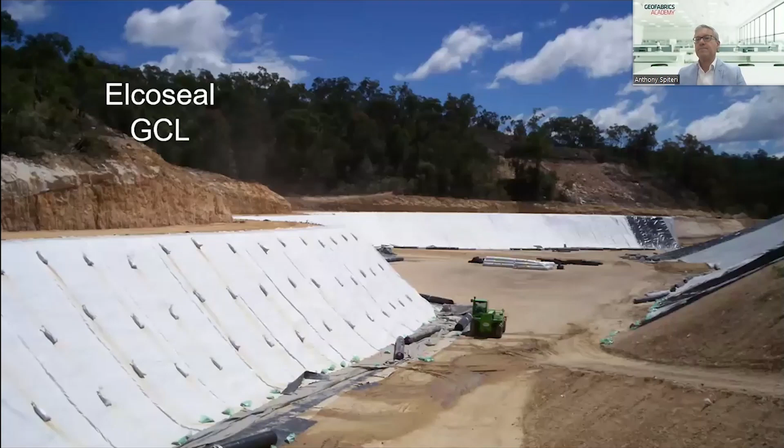And here's an example of a liner or a cell going in and the use of a composite liner on the slopes of that particular cell. So you'll clearly see the GCL underneath, overtopped with a geomembrane, a cushion geotextile on top. And this is a typical cross-section of the Elcoseal type GCL.

The top or cover geotextile is normally a non-woven staple fibre geotextile manufactured at our Gold Coast facility. The middle part of the product, we use a powdered bentonite mined in Queensland. Other overseas GCLs can use granular bentonite. And the bottom, or the carrier geotextile, is normally a woven geotextile with or without a non-woven composite. So the woven only will be our X800 and X1000 grades, and the composite, which is the woven non-woven, will be our X2000 or our X3000 or the various other hybrid GCLs that we manufacture.

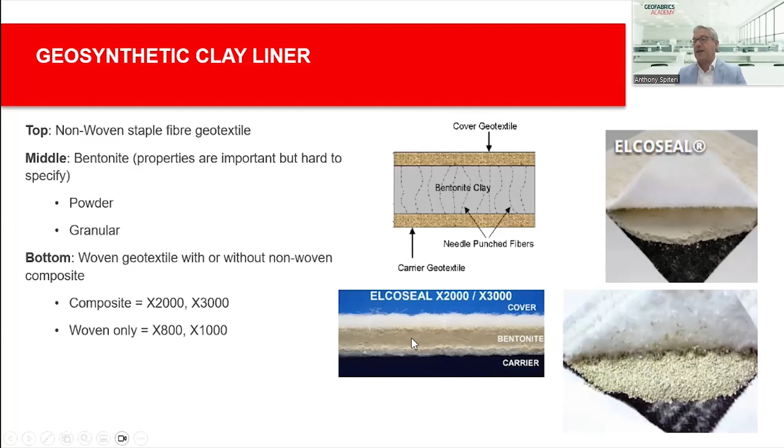So the photo you see below here, Elcoseal X2000, X3000, shows a really good cross-section of a hydrated GCL with the bentonite not in powdered form, but obviously been exposed to moisture, and is in a gel or a pasty type form.

One of the major criteria as part of BPEM is that the supplier of a GCL must demonstrate the durability of bentonite. The BPEM guideline clearly states the use of pH modifiers is actually demanded, stating on page 96 that sodium activation or beneficiation must be done to increase the amount of exchangeable sodium plus ions. So the guideline requires demonstrated durability of bentonite used within the GCL that contains additives comprising both the pH modifier and polymer additions. This requirement must be considered best practice.

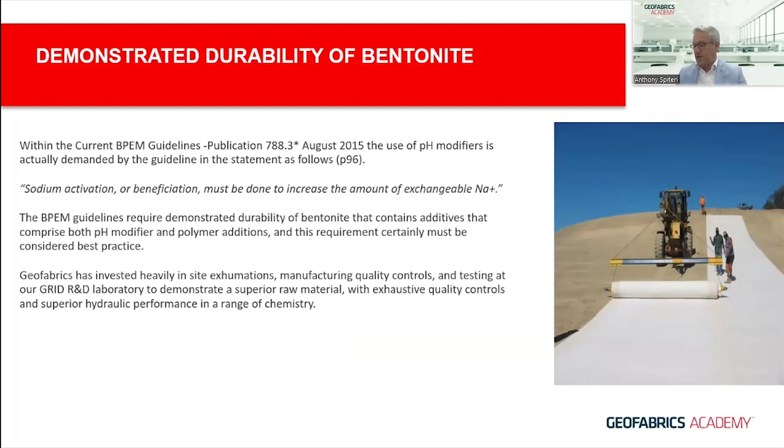Geofabrics over the years has invested quite heavily in this part of the market, with in-site exhumations, manufacturing quality controls, and testing at our R&D lab to demonstrate a superior raw material, which is the powdered bentonite, with exhaustive quality controls and superior hydraulic performance in a range of chemistries during the production phase.

There are 5 key requirements of performance spelled out in BPEM that we believe demonstrate long-term durability, and these are the 5 here.

Very briefly, there's a statement as to the nature of the additives. There are technical papers both from industry that correlate directly to the additives used by Geofabrics, as well as from industry that test the Elcoseal GCL product with the additives. That testing is done independently.

Fourthly, in-house and project-specific testing for clients that exceeds what industry considers best practice, carried out over an extended period to demonstrate longevity. This longevity is demonstrated in the 5th key requirement, that site exhumations were carried out with up to 17 years exposure in service.

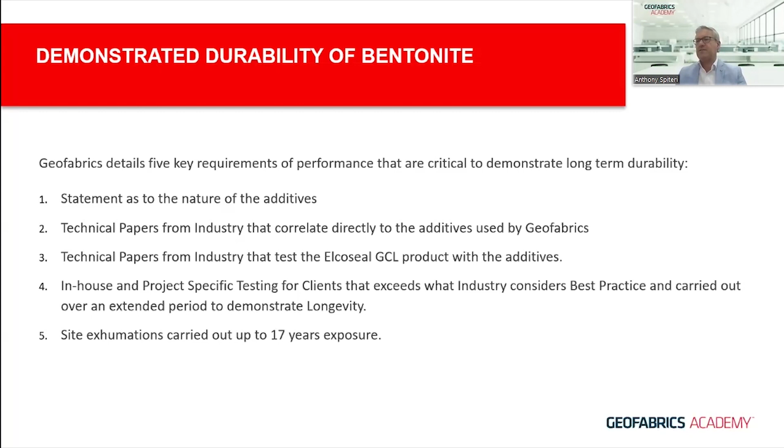Part of this will be on a typical landfill cell construction or a cap construction that Geofabrics can detail, and we'll send you a letter detailing this particular work carried out with these 5 key items I just talked about. So you'll get a letter similar to this - the first opening paragraphs will talk about your project, the product used on your project, and how it demonstrates the durability of bentonite.

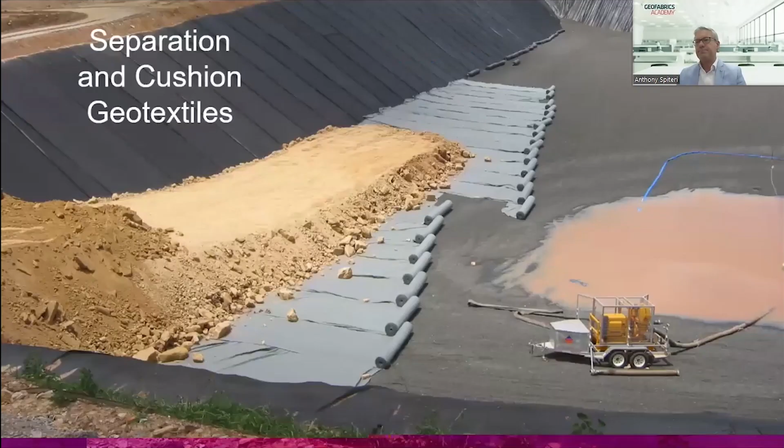Moving on to separation and cushion geotextiles, you can see quite clearly here in the photo the rock which forms part of the drainage layer for the leachate in the baseliner, and you have the separation or sacrificial, in some cases, geotextile layer out there in the colour - the bit of product. One of the major parts of a technical specification for a landfill baseliner is looking at optimising the protection for the geomembrane within that lining system.

So you as a client need to carry out a cushion test. The cushion test is carried out in the laboratory - it can be carried out by our GRID team, or independently through other testing companies in Australia. Essentially what we're trying to do is show what the geotextile provides as far as protection for the geomembrane layer - it provides cushioning and protection, and they're considered essential elements of that lining system.

Part of the cross-section will consist of a GCL, a geomembrane, a cushioned geotextile, the leachate stone, and embedded on top of the geomembrane will be a very thin aluminium plate, used to try and simulate when the load is applied to that system, that the rock is then trying to push through the geotextile and into the geomembrane. So essentially what happens is, after the test, the aluminium plate is taken away and assessed, and the strains are generally recorded.

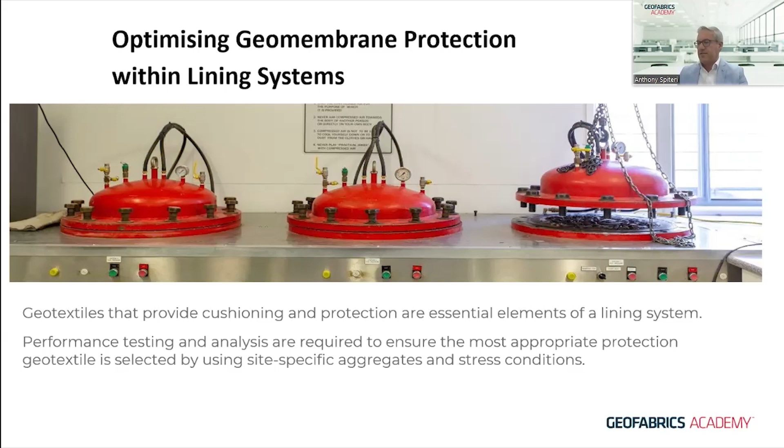Moving on to test standard comparability, and this is really the major part of the presentation today - the many questions I receive on this topic. As you know, geotextiles that provide cushioning and protection are very essential elements of a lining system.

The Geotechnical Inspection and Testing Authority, also known as GITA, post-delivery of goods to site, is MQA related. We generally get lots of questions and inquiries about this as far as test standard comparability.

As an Australian manufacturer, Geofabrics utilises the AS 3706 suite of Australian geotextile testing standards. These standards are modelled on internationally accepted geotextile testing standards. So in the interests of manufacturing and testing reporting consistency, and where equivalency has been clearly determined, the Australian standard is generally selected as a standard of choice.

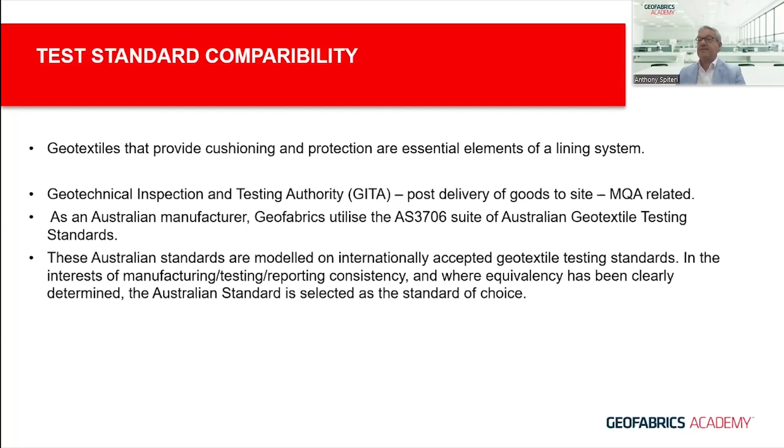You will all be familiar with the various standards around the world, whether they're ASTM - obviously we have AS standards here in Australia, and there are European standards for the European Union. So what I'm trying to simulate here is just giving you a bit of an idea for the various geotextile mechanical and hydraulic properties, what the specification standard may be, and secondly, what is the manufacturing standard Geofabrics takes up as part of when we make these products.

As you can see, we've got various mechanical properties and hydraulic properties. Mass per unit area is the first one.

So essentially, if we're comparing AS 2001 with AS 3706, that refers directly to testing as per AS 2001, but it requires 10 specimens to be tested rather than only 5. So we find that AS 3706, with 10 specimens being tested, is more onerous and better suited towards geotextiles.

Similarly, against the ASTM standard D5261, both standards specify 10 specimens again, and a minimum specimen size of 100 by 100 millimetres. They record the weight to 0.01 grams, so it's very accurate, and the unit of measurement universally is grams per square metre.

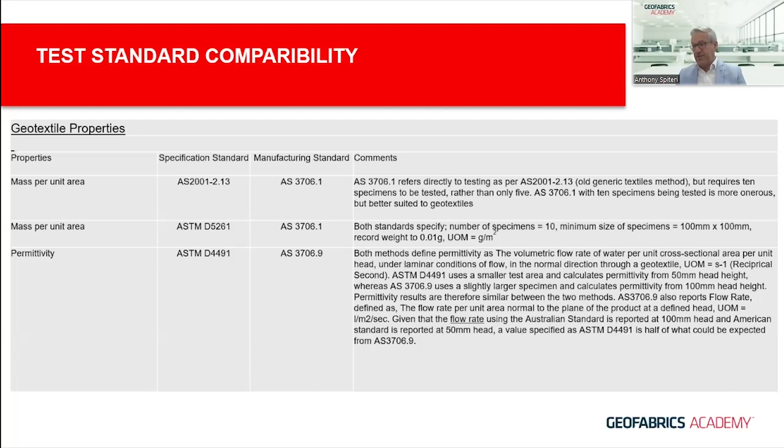Given that the flow rate using AS is reported at a 100mm head, and American standard at 50mm, the value specified in ASTM D4491 is about half of what could be expected from AS3706.9. So comparisons can simply be made.

There's a few more here which I won't go into all of them, but it includes grab tensile strength and elongation, trapezoidal tear strength, puncture or CBR strength, and also UV resistance.

I'll briefly talk about the last two, CBR strength firstly. Both standards specify 10 specimens, a plunger diameter of 50mm, a clamped open test area diameter of 150mm, and a machine speed of 50mm per minute. The unit of measure is simply newtons or kilonewtons.

So a lot of this testing is carried out at our Albury facility when we are making the bitumen product, and we must comply with these standards.

Finally, I wanted to mention UV resistance, which I'll explain in a bit more detail. Both standards specify 500 hours of exposure, roughly 21 days, to determine the durability of the geotextile with regard to degradation in tensile strengths, caused by exposure to intense ultraviolet light and heat using a controlled xenon arc light source. The unit of measure is simply % strength retained.

So these are effectively tested before they go into the UV testing regime, and then once it's gone through the 500 hours exposure, they are retested so you can calculate your % strength retained.

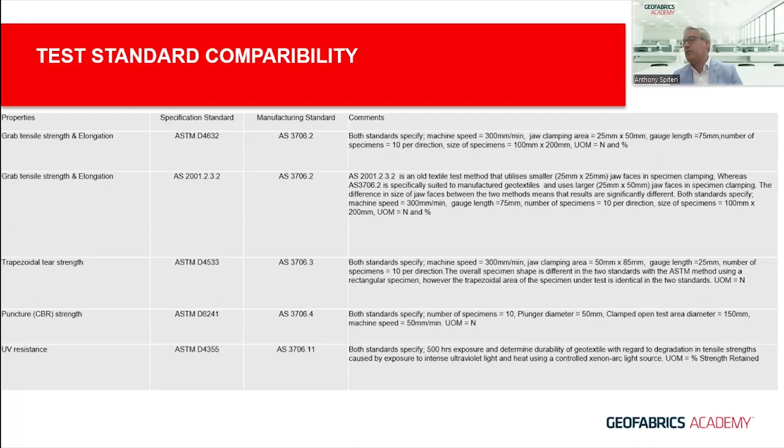If we move briefly towards drainage geocomposite properties, geocomposite drains are used quite extensively on landfills, in particular landfill caps or landfill slopes, where they drain away excessive stormwater. Again, you find a lot of these particular designs are equivalent.

If we talk simply about mass per unit area, which is the GeoNet with the geotextiles laminated to either one side or both sides, the ISO standard 9864 is equivalent to the AS3706.1. Likewise with the peak tensile strength, both machine direction and cross machine direction, as well as the elongation at break, those two particular standards are equivalent.

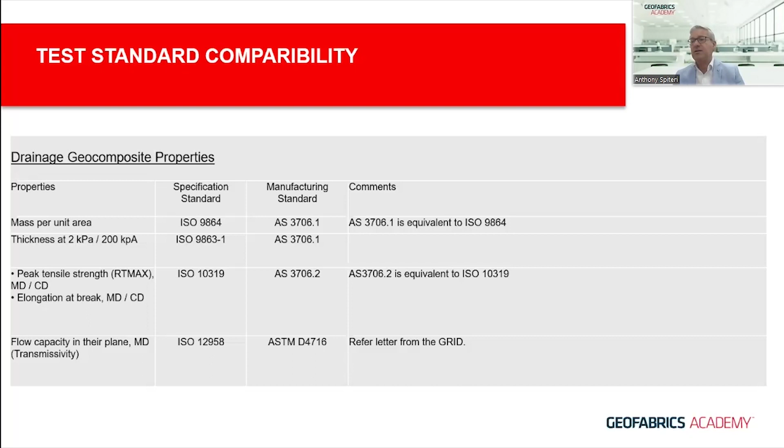Finally, with the flow capacity in their plane, or the transmissivity in the machine direction, we refer to a letter from our GRID, which I detail here. There are a couple of noticeable differences that can be spotted between those two standards, and we like to explain what they are so you're very clear about what happens when you get your material quality assurance.

The ISO 12958 appears to stipulate that a closed cell foam rubber must be placed against the sample surface, whereas the ASTM D4716 states that rubber or a rigid surface, can be used depending on the type of substrate you're trying to emulate.

The ISO standard also stipulates we must use de-aired water or water from a stilling tank, whereas ASTM does not comment on water de-airing at all. Our system here at the lab on the Gold Coast doesn't have a stilling tank, and there's certainly no way to de-air the water. So the system is not set up so that we can vacuum the water for testing. However, upon placing the sample in the apparatus for testing, we do flush out noticeable air bubbles.

Some systems will use de-aired water because it is thought that dissolved oxygen might have an effect on flow. In this situation, though, we are finding currently that it is making very little difference.

Using foam rubber as a substrate can have an effect on the test outcome. However, when requested to do ASTM testing to compare to the ISO result, we set the system up the way the sample specification stipulates. So over the past 2 weeks, I've performed testing to provide ASTM D4716 results when my client only had an ISO 12958 result. It appears the results are comparable.

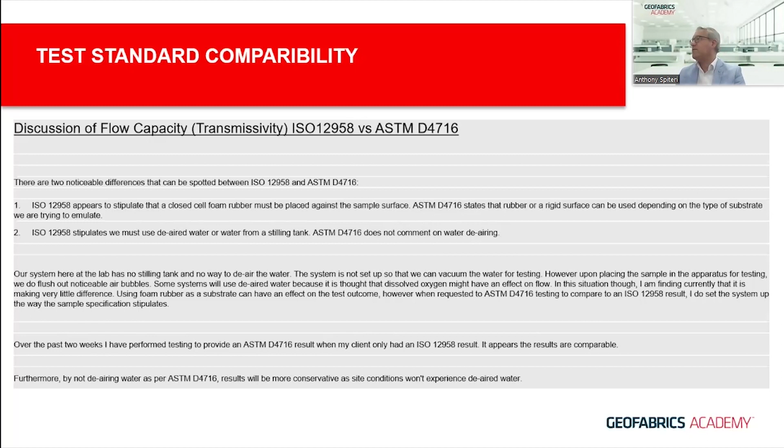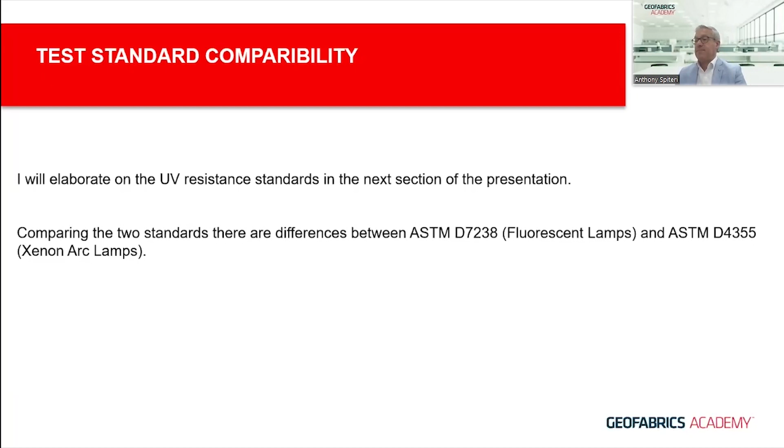So now I'll elaborate on the UV resistance standards in the next section of the presentation, and compare the two standards that are different between ASTM D7238, which uses fluorescent lamps, and ASTM D4355, which uses xenon arc lamps. So looking particularly at sacrificial geotextiles, it'll be exposed to the elements and it will naturally degrade.

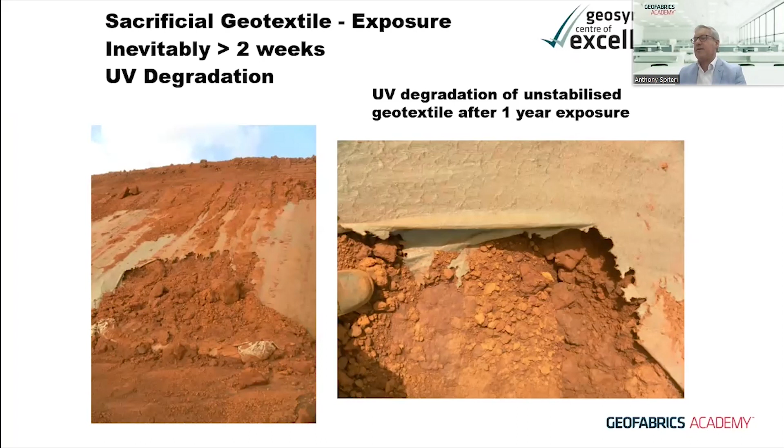So we've got a couple of shots here showing the geotextile after 1 year exposure and how it can degrade according to UV. So part of this testing regime is set out to ensure that you're very well familiar with what product you are getting on site.

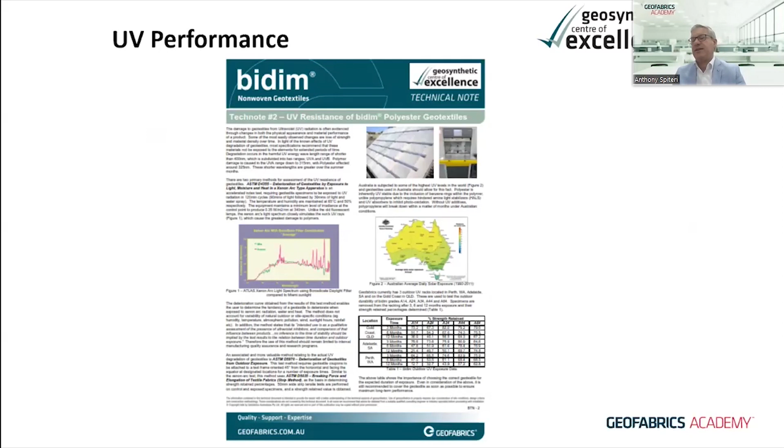So this is one of the tech notes we prepared a few years back on the UV resistance of bidim polyester geotextiles. We have copies of this available to you, but I will talk more about this particular setup over the next couple of slides.

So there's two primary methods for assessing UV resistance of geotextiles. The first one, ASTM D4355, looks at using the xenon arc type apparatus. It's known as an accelerated index test, and it requires geotextile specimens to be exposed to UV radiation in 120-minute cycles.

These cycles involve 90 minutes of light, followed by 30 minutes of light and water spray. The temperature and humidity are maintained throughout the test, and the equipment maintains a minimum level of irradiance at the control point. So unlike the old fluorescent lamps, the xenon arc's light spectrum closely simulates the sun's UV rays, which cause the greatest damage to polymers.

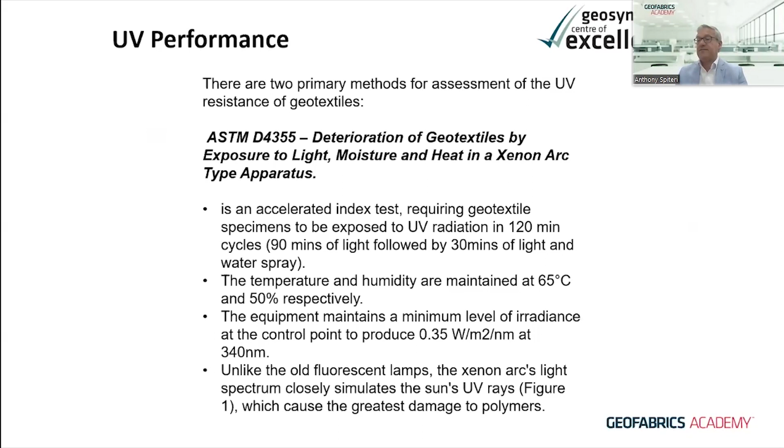We're trying to indicate that in the graph here, which shows the peaks and the troughs of the xenon exposure compared to light rays.

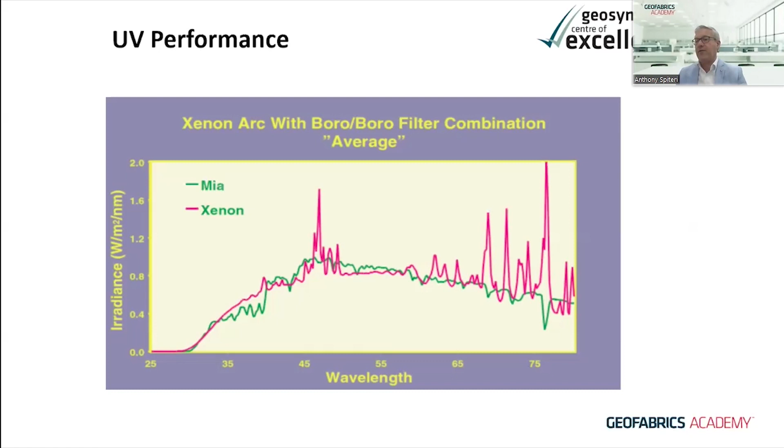So the deterioration curve you normally obtain from the results of this test enables the user to determine the tendency of a geotextile to deteriorate when exposed to xenon arc radiation, water, and heat. Now, what it doesn't do, it doesn't account for variability of natural outdoor or site-specific conditions. These can include humidity, temperature, atmospheric pollution, wind, etc.

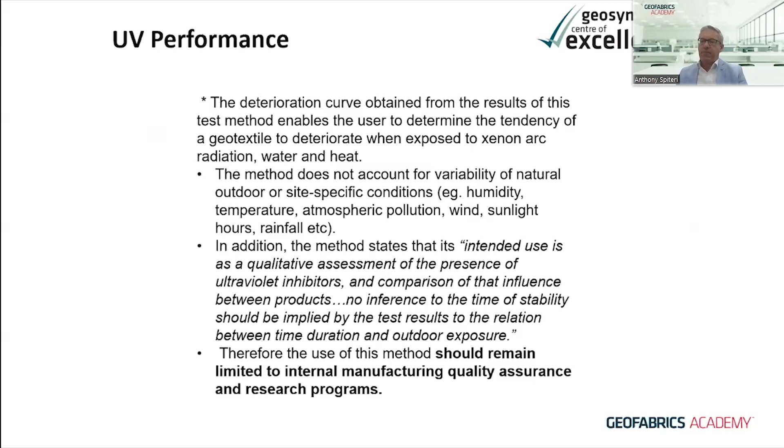In addition, the method states very clearly that the intended use is as a qualitative assessment of the presence of ultraviolet inhibitors and comparison of that influence between products. No inference to the time of stability should be implied by the test results in relation to the time duration and outdoor exposure. So what we're trying to say here is that the use of this method should remain limited to internal manufacturing quality assurance and research programs.

That steers me to a different ASTM standard, D5970-09, which covers the deterioration of geotextiles from outdoor exposure.

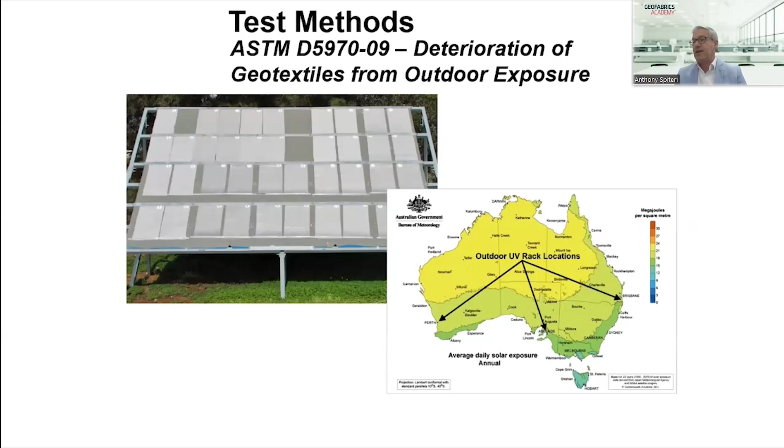So many years ago, Geofabrics set up these outdoor UV racks and located them in 3 locations in Australia: Perth, Adelaide, and Brisbane. A number of tests were carried out based upon the exposure of geotextiles to natural sunlight.

So this requires geotextile coupons to be attached to a test frame and facing the equator at designated locations. Similar to the xenon arc test we just spoke about.

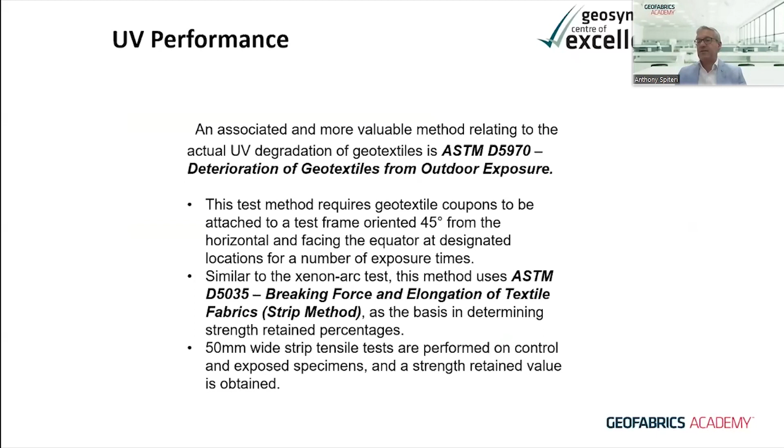This method uses ASTM D5035, the breaking force and elongation of textile fabrics, as the basis in determining strength retained percentages. So 50mm wide strip tensile tests are performed on both control specimens before testing and exposed specimens, and a strength retained value is obtained.

So as I mentioned before, we've got these 3 outdoor UV racks. At this particular time, we were testing bidim A14 through to A64, and specimens were removed from the racking after 3, 6, and 12 months exposure, and their strength retained percentages determined.

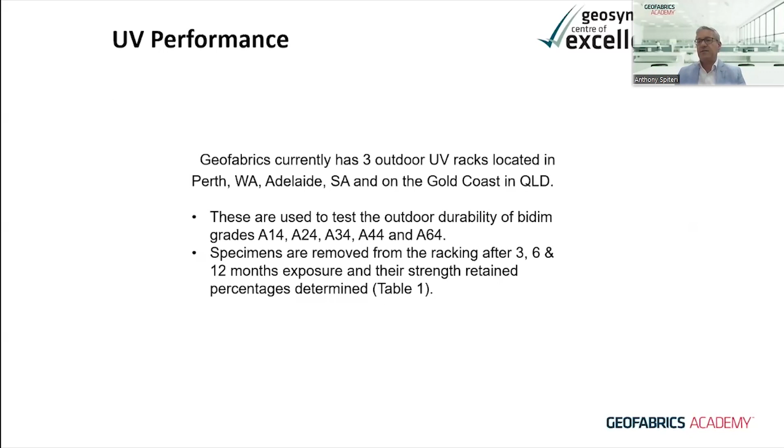And this is also consistent with the higher cushion geotextiles, which don't appear in the table here today, such as A74 and A84, which are the 2 grades that are probably used more consistently within baseliners in Victoria.

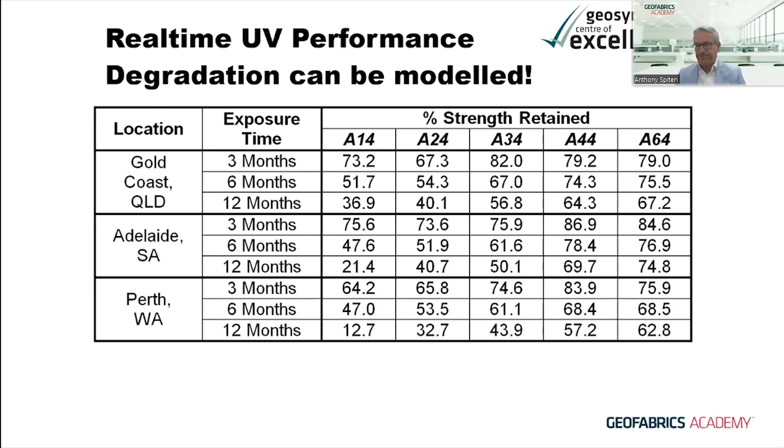So the table really highlights the importance of choosing the correct geotextile for the expected duration of exposure. We do highlight that it's still recommended to cover the geotextile as soon as possible to ensure maximum long-term performance.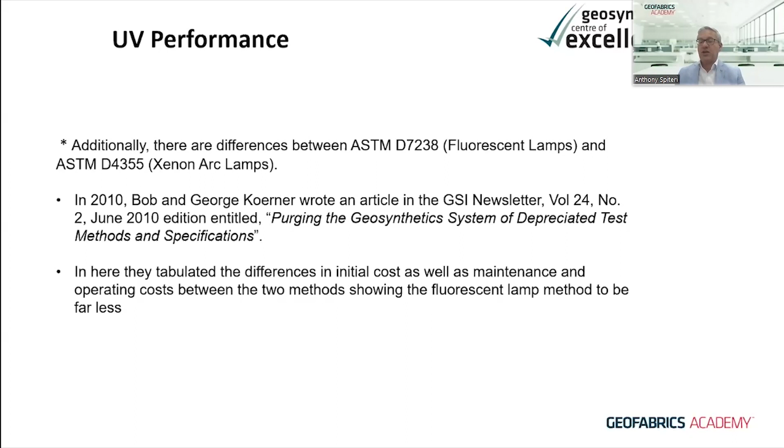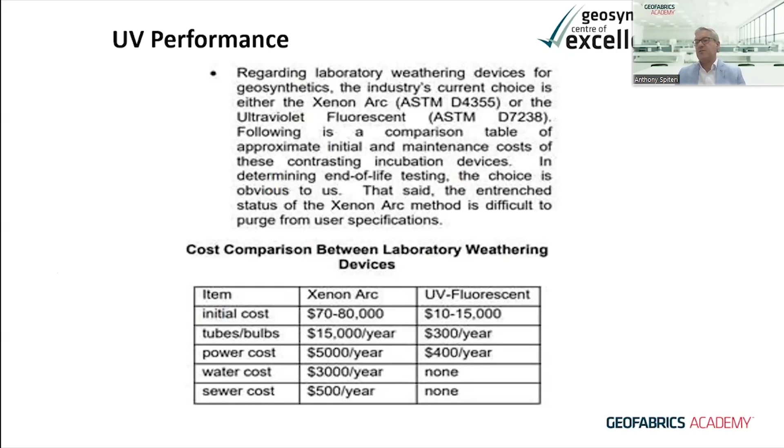In essence, Geofabrics uses the UV or fluorescent method to do our testing, and you can see quite clearly the cost comparison between laboratories with their weathering devices. The xenon arc has a very expensive initial cost, including running costs of tubes, power, water, and sewer costs, compared to the UV fluorescent. So you can see why that particular system is suited in Australia.

This led to changes being made in the GRI, both the GT12 and the GT13, way back in 2012, to move from xenon to fluorescent.

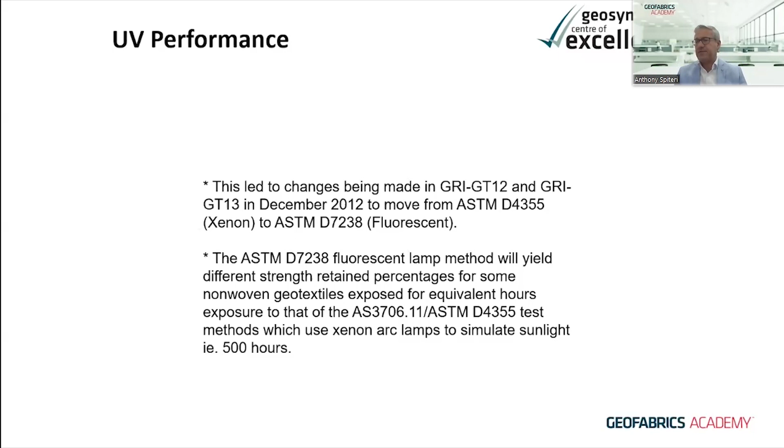The fluorescent lamp method will yield different strength retained percentages for some non-woven geotextiles compared to D4355, which uses xenon arc lamps to simulate sunlight over a 500-hour period.

What Geofabrics will do is issue certificates of conformance to our clients, whether it's greater than 50% strength retained in this particular certificate. That can be based on actual testing in the UV fluorescent tube apparatus, or we can provide a certificate of conformance for a 12-month period, as we do this testing every 12 months.

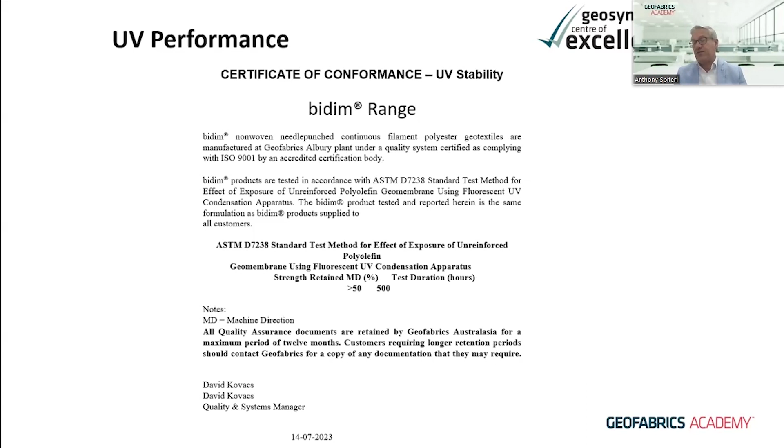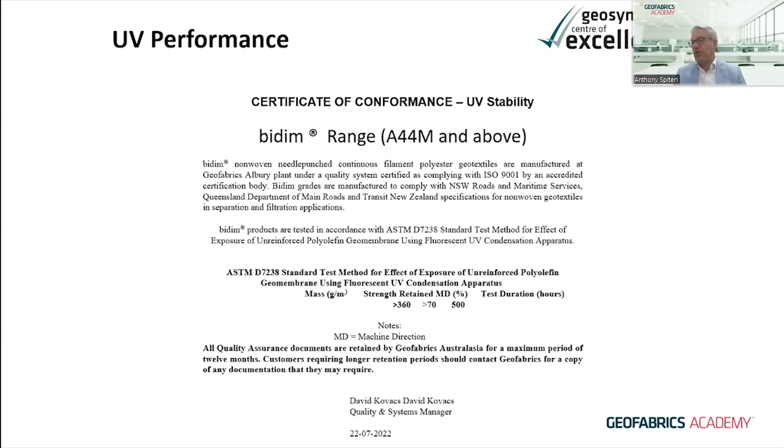The second certificate, in this particular case for a range of A44M and above, shows a greater than 70% retained value. So the 50% and the 70% are the two values we see most often in technical specs in Victoria.

If I finally move on to our last topic, which is our GRID R&D laboratory based on the Gold Coast. If you haven't used or utilised their services before, I strongly encourage you to do that.

They can provide on-site support for you, particularly as a consultant, where they can provide analysing and reporting in accordance with Australian and international testing methods. They can assist with supplying in-field trial research being conducted around the world, and also developing customised solutions.

Particularly in the area with GCLs, looking at leachate compatibility with GCLs. As you know, leachate has its own fingerprint - it can be different for different sites - and we are able to make sure that leachate will be compatible for that particular grade of GCL.

They also provide ongoing training and development by conducting technical seminars and workshops, like we have today with the Geofabrics Academy e-learning hub.

Looking at the performance of geosynthetic products, current examples of some of the R&D work that the GRID carries out: as we spoke about, UV testing of geotextiles is a very important part of their work, as well as looking at chemical compatibility, not just with PE liners but also GCLs.

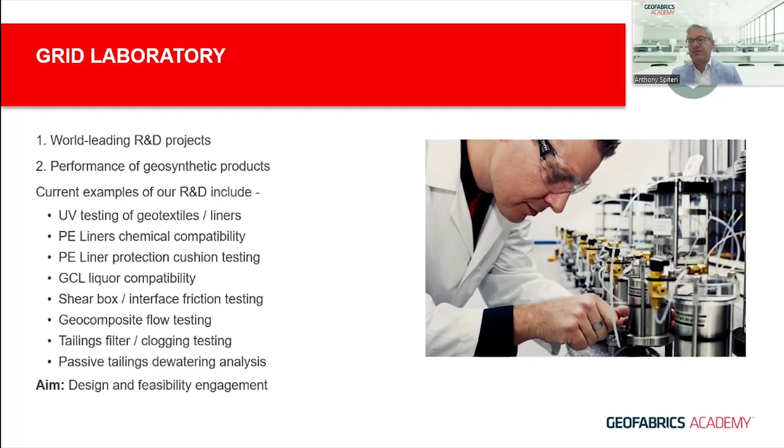Finally, I just wanted to conclude by looking carefully at some of the topics we raised today. Firstly, the Victorian EPA BPEM guidelines we discussed. We talked about the demonstrated durability of bentonite and what Geofabrics can do to assist you with that leachate for every particular site. We looked at the role of separation, cushion, and sacrificial geotextiles in baseliners.

We then looked at test standard comparability, comparing Australian standards with some of the overseas ISO or ASTM standards. We looked at geotextile UV resistance testing, comparing the two standards, whether it's xenon arc or UV fluorescent testing. And finally, we spoke briefly about the Geofabrics GRID based on the Gold Coast.